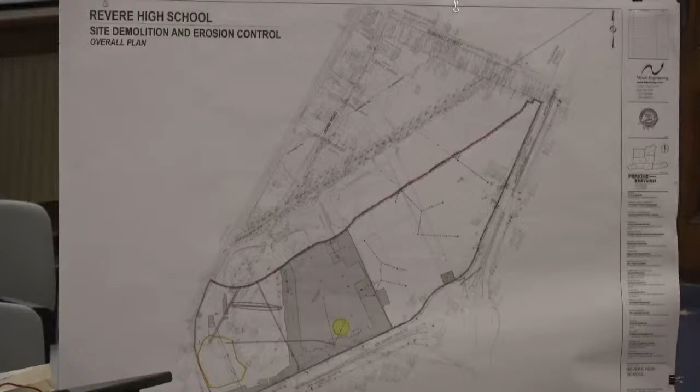This notice of intent, I know the commission's been long awaiting, learning more about the Revere High School project at the Wonderland site. This is for site preparation activities, so it's not necessarily for construction of the entire school at this point. It's really just phase one, preparing the site for that next phase of construction.

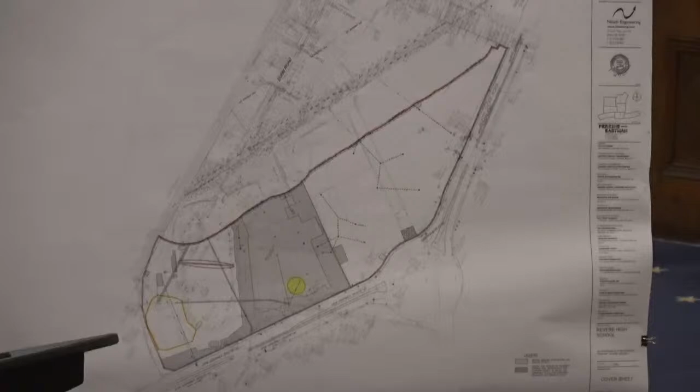To start the project off, the contractor would be enclosing the eastern portion of the site with construction fencing, chain link fencing, that's about 6 to 8 feet tall, I believe. And that's shown here in pink surrounding that portion of the site.

It's all in the paved portions of the site. As you see here, that western boundary of the limit of work runs right along the 200-foot riverfront area that extends from the eastern county ditch. So there's not going to be any work within the riverfront area as part of this phase one.

Along the construction fencing will be erosion and sedimentation controls. We had a site visit with a few of the commission members on February 1st, and a commission member requested that we provide a little more detail on the plan set of specific erosion and sedimentation controls installed around the limit of work. So along the 200-foot riverfront area, we're going to have super silt fence, which is just silt fence affixed to the construction fencing. And that'll be paired with mulch wattles as well.

And then those mulch wattles will just continue around the entire remainder of the limit of work. And when I say limit of work here, that's really encompassing where the fencing is. However, the limit of disturbance is not going to occur within that entire footprint.

As you can see here in the gray hatchwork, that is the proposed pavement and remnant foundations that'll be removed as part of this part of the project. It's about 4.4 acres worth of impervious area to be removed.

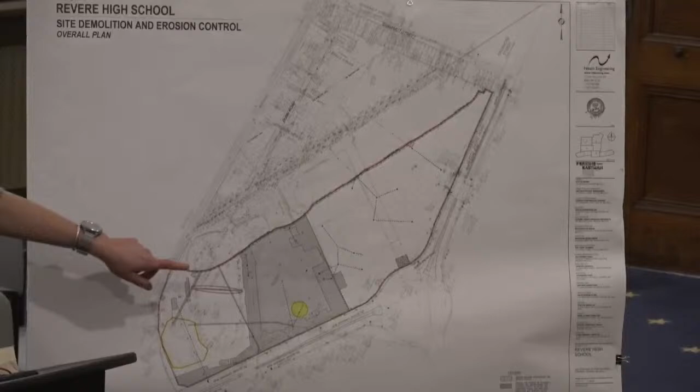That's a good question. With respect to what's under the foundation, for the most part it's really drainage that's somewhat minimally connected to other pieces of infrastructure within the site. The contractor would absolutely ensure that wherever they cut it off to pull out infrastructure upstream, there would be a disconnect or a plug of the stormwater system, so anything removed wouldn't continue discharging downstream.

To the second point, as far as the status of any existing infrastructure, to my knowledge it's not in great shape. It has not been maintained for many years. I believe Dave Conway is on virtually, I don't know if he's raising his hand. Potentially he might be able to touch on this more from an engineering standpoint.

I can speak to it a little bit. Thank you, Dan. The stormwater system there, as Claire said, has not been maintained. There's no real water quality components of the existing stormwater system. There's nothing that addresses quality. It's simply some catch basins that then outlet into the Eastern County ditch.

During construction, we're going to ask the contractor to clean the existing structures that are going to remain through this phase. They'll all be protected with silt sacks, maybe some filter mitts around them to reduce any potential for anything to get into them. But there's not really much of a functioning stormwater system out there now. Dare I say that probably hasn't been pumped out in 20 years, at least.

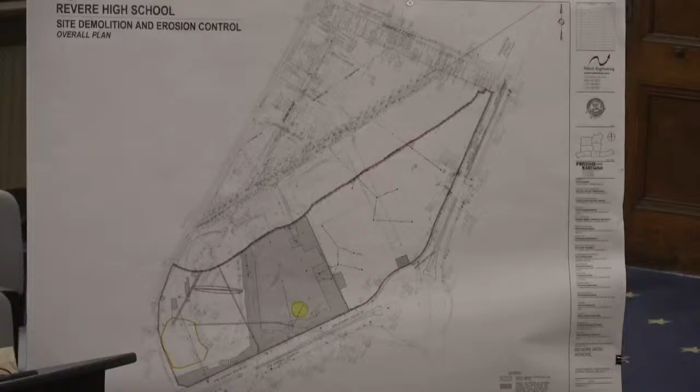Sounds good, I don't have any other questions. If any of the other commissioners have questions? I had just a quick question. In regards to traffic, is this all being contained inside of the lot that's being done? Will there be anything involved with traffic that will affect anybody? That is a great question.

The site access will be provided off of Butler Circle, right there, that's where the existing entrance is. The gate will be set back, I believe, at least 30 feet off of that entrance, so if any cars are coming in they'll have some space to pull in without actually stopping at Butler Circle.

But with regards to safety of folks coming in and getting around while contractors are coming in and out, VHB is also part of the project team. They're the traffic engineer, they've been working with MassDOT District 4 Boston, and we'll have to get a temporary construction access permit through them for this phase of the work as well, so they'll be working closely with MassDOT to ensure safety measures are implemented.

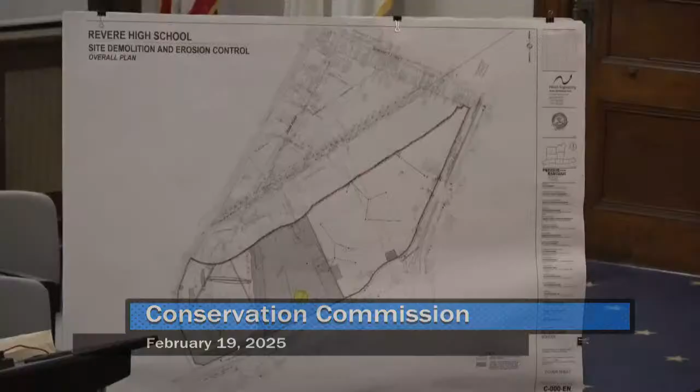One question that whenever this project gets brought up, and I get asked all the time as a commissioner on this, is whether or not the people that have been living in that area have been removed as of today, if the site is clear basically. To my knowledge it is an ongoing effort from the Revere Police Department to be assisting with that effort.

It's something that is a big part of why we wanted to take the vegetation out in that southern portion of the site and enclose the entire site with construction fencing, just in an effort to protect everybody's public safety during this process. So that's something the project team is keeping in mind and continuing to coordinate with the city to make sure those folks are off the site before any of this work starts.

I think that's perfect as far as the safety of everyone around, as well as for even safety of the site, being able to have it as difficult as humanly possible for someone that isn't supposed to be there. I think that's the best for the city of Revere and for everyone involved. Yeah, thank you. Any other questions?

When it comes to the erosion control and the sedimentation control, the process to keep making sure during construction - what I've seen in the past is that it gets moved, or because this is going to take many years, it's going to need to be maintained. Is there a plan for that?

Yes, absolutely. That's absolutely a part of, I believe it's even in the stormwater plan that we provided in the notice of intent application, but that SWPPP I mentioned earlier, that'll be a federal permit with the EPA. That will require the contractor to do weekly inspections and maintenance immediately - usually within 24 hours they would have to maintain or repair anything - and regular reporting as well, so they would have reports on site documenting all these inspections. There's usually also going to be another inspection that would occur after typically a quarter inch rain event or more.

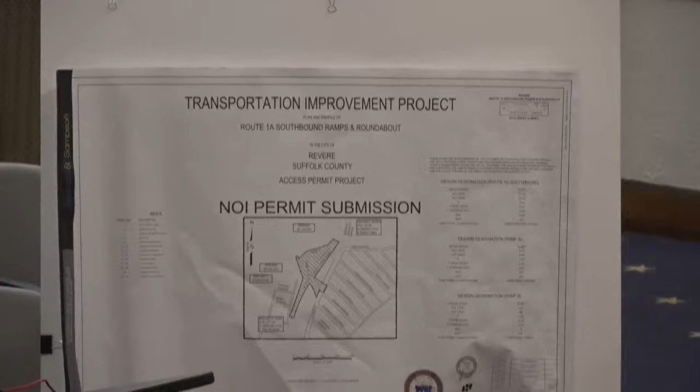Tonight we are looking for approval of our submitted NOI. A little bit of information about the project: tonight we're going to be talking about Phase 1 only, which is the roundabout and traffic infrastructure improvements for that part of the project. Phase 2, the Gibson Park Access Road, will come back again when that part of the project is ready to be submitted to this commission. The phase one part of the project will probably take about 2 years to complete.

We have not awarded the bid to any contractor, and it has not gone out to bid yet. But when it does, there'll be a construction schedule approved prior to any construction commencing. The traffic management plan is currently with MassDOT and has not been approved; that approval usually comes when we get the state access permit. Lastly, there will be some detours and overnight shifts. All residents in the area will be notified of any detours or overnight shifts that occur.

Most importantly, and what we're going to talk about tonight, is really the erosion controls and the steps we will take to keep the project from affecting the environment during construction. That will be maintained throughout the construction. I'm now going to turn it over to Devin, and she's going to talk a little bit about the environmental impacts.

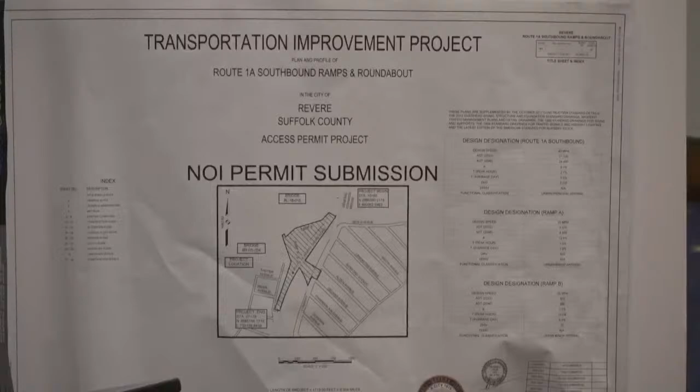We're hoping to display a presentation on the laptop that's connected, but if not, I do have some paper copies I can hand to you. Just make sure to state your name for the record. Devin Herrick, wetland scientist with Weston and Sampson.

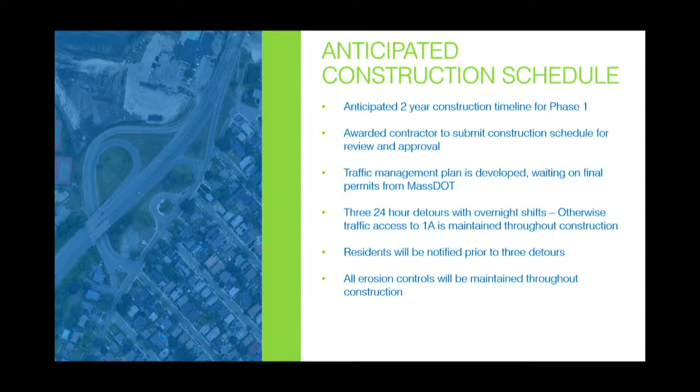This is the construction schedule slide that Julie had just gone through, so I'm going to slide right on over to an aerial map just to refresh folks' minds as to where this project is located. It is out on Point of Pines. For anyone who is perhaps a little less familiar, this is a zoomed in view of what the area looks like right now. The proposed project is on the northeast side of Route 1A. Right now you'll see two concentric ramps, and that is the area where we are proposing to install a roundabout.

As Julie mentioned, there is project phasing involved. We are here to discuss phase 1, which has a longer construction period. Phase 2 requires additional permitting in the form of some Article 97 concerns and Chapter 91, and it has a much shorter construction timeline, so that's only a matter of months. It's basically just installing a paved roadway in an already flat area; there's no regrading involved. So we expect these two phases will complete roughly around the same time, despite being on very different tracks due to permitting constraints.

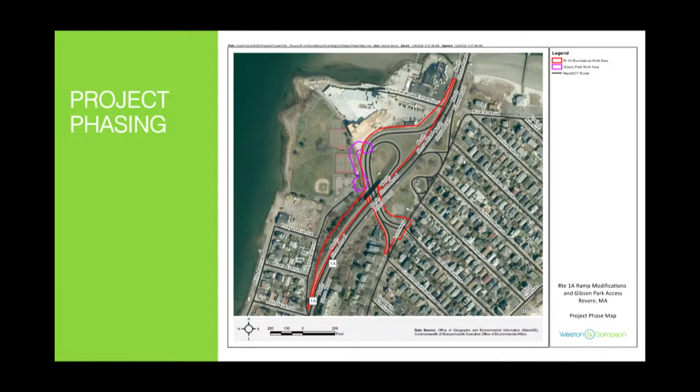And with that, I'm going to turn it over to Taryn to discuss a bit about the project. Good evening, Commissioners. My name is Taryn Wong, I'm a senior civil engineer with Howard Stein Hudson and one of the project engineers on this project. With this slide, I'd just like to again reiterate that we are talking about phase 1 tonight. Phase 1 is the new roundabout intersection that replaces the two concentric ramps, the southbound ramps. I think Devin might have noted northeast corner, but I think it's actually northwest, the western edge side of Route 1A. We're talking about the southbound portion of Route 1A.

So 100% of this project is within state right-of-way and is under the jurisdiction of MassDOT. We will require an access permit from both MassDOT and DCR because the project limits to the south intersect with Lynway. We also are proposing some work on Lynway, which is under the jurisdiction of DCR. This project is also adjacent to the current, basically finished, site development of 22 Whitin, also known as Gibson Point, that large building with several apartment units, and also the Gibson Park Access Project, which was stated to be phase 2.

That is installing that driveway with no regrading, providing access to and from the roundabout for the proposed Gibson Park upgrades. But again, that is phase 2, and with phase 2, we hope to file that Gibson Park access under a separate NOI as the permitting proceeds.

I'd like to also note that during this construction of phase 1, the roundabout and the new on and off ramps, that emergency vehicles will have access to residential areas, including the Point of Pines neighborhoods on the eastern side of Route 1A, as well as the Riverside community. During all times of construction, we know that this is a concern.

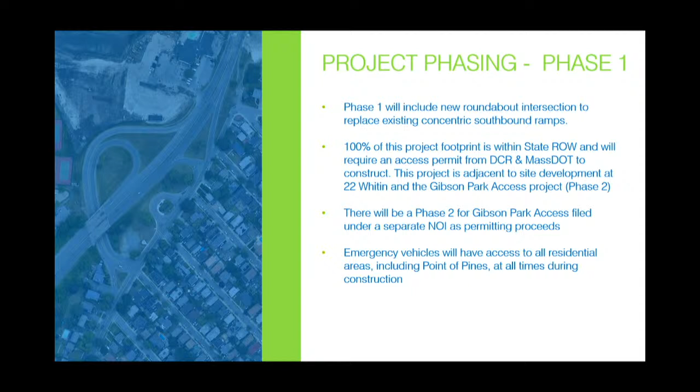We have actually worked quite closely with the Revere Fire Department, even on their reconstruction of their new fire department, right at the edge of the project limits. I think it's the new Point of Pines fire station, I can't remember the exact name, but yes, we've done quite a lot of coordination there.

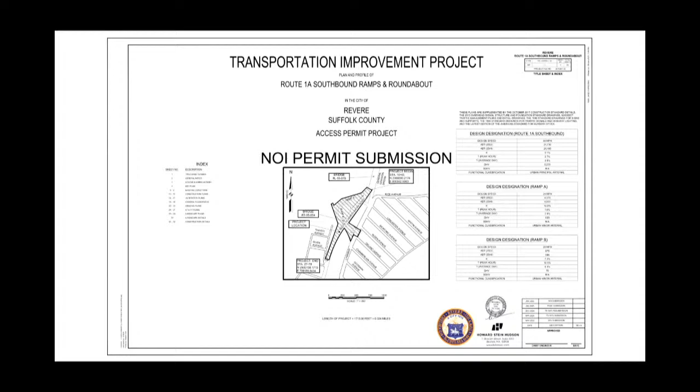So right now on the screen, the PowerPoint is showing the plans. We'll try to go through everything via the PowerPoint, but if we need a zoomed-in version, we can display it here on my left with the hard copy. I'd like to go through it, and I want to note there is an overall graphic at the end to help orient us better.

I'm just going to go through each individual construction plan sheet to describe what work is happening, but again, I will provide a high-level combined graphic, a colorized graphic, at the end of these construction plans.

So here, the project limits to the south would be at John Ave, Hayes Ave, that intersection where Route 1A meets those two roads. We are not proposing to do any work in the intersection, but our project will end right before that intersection.

We are looking to construct a new on-ramp, replacing one of those concentric ramps with a new on-ramp called Ramp B. That would be adjacent to the Gibson Park parcel, allowing vehicles to enter Route 1A southbound. This is what this plan here is showing.

In this phase, can you go back to that? In this phase of the project, what impact will there be on Hayes Ave during this portion of the construction?

There should be no impact to Hayes Ave. There will be impact, you will see construction vehicles and construction equipment on Route 1A, but our current plans have no construction staging or equipment staging on Hayes Ave. We should not be impacting that road at all with this project.

I'm sorry, I know you said at the end you wanted to show us the overall of everything. I mean, he's lived there his whole life and he still doesn't understand what's going on. So if you wouldn't mind skipping to the end for a second, just even a minute of showing us what the end project looks like, maybe even a comparison of the end versus what it is now, because I'm still completely confused.

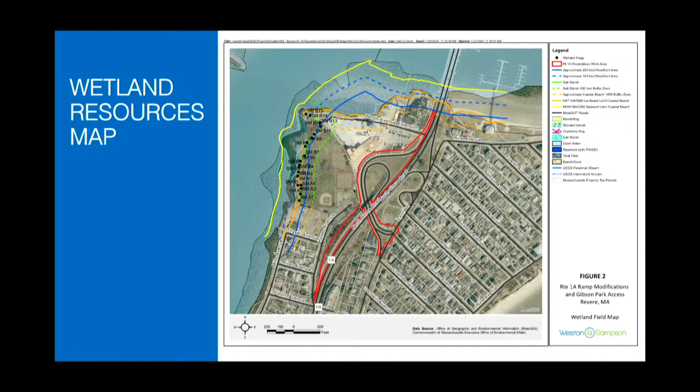We also have 100-year floodplain impacts. That doesn't make up the entirety of the project site, but it's a good chunk of it, and we can see that here. It's a little hard to see, but the entirety of the area is stippled to show that we have that Barrier Beach and Dune area. We also have a map showing the approximate limits of the 100-year floodplain, which were updated on the plan set based on elevation — I believe elevation 10 in this particular area.

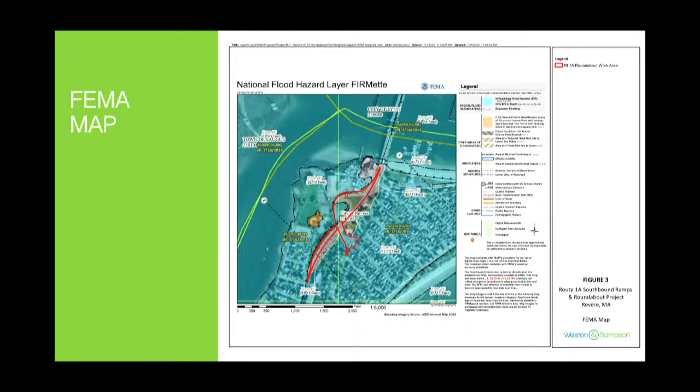To break down the specific impact numbers, we're looking at a total impact to 100-year floodplain, or land subject to coastal storm flowage, of 65,611 square feet. When we talk about permanent impacts, we mean anything resulting in a grade change or a materials change, whereas a temporary impact is something currently impervious that will remain impervious, or currently pervious that will remain so, without any grade change.

We also have Barrier Beach and Coastal Dune, both of which we're expecting to see a total of 186,335 square feet of impact.

One thing that we are looking to do on this site to improve the area is right now plantings are very sparse, if present at all. It's just a weedy mix that's located on the side of the highway. So instead...

44,714 square feet of the area will be replanted with native dune plantings. We have included the planting list so you folks can see the kind of palette that we're looking for. They were all taken off of the CZM list, and they are recommended for plantings in dune areas.

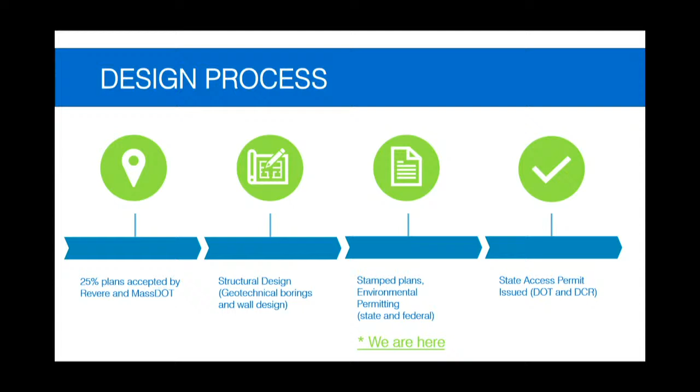So just a brief reminder on where we are in the design process. We have the stamped plans, and we are completing the environmental permitting. We will then go to the final step, which will be to get the state access permits issued from both DOT and DCR, and at that point, we will be ready to go.

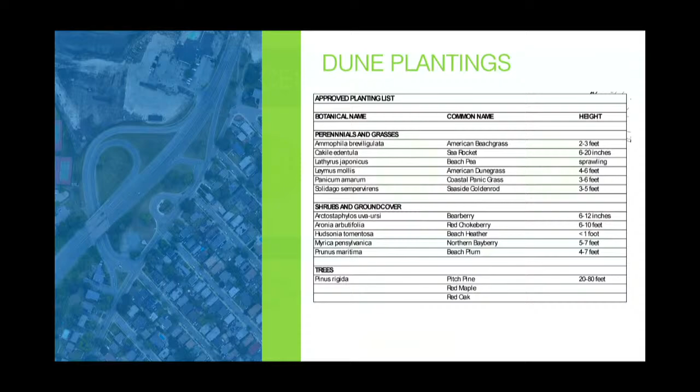So during the construction or after the fact, you have all these plantings. Who will be responsible for maintaining them? They're in the DOT right-of-way, so they will be DOT's responsibility to continue. They are dune plantings, so they don't really require much in the way of maintenance. I would imagine that they'll follow their current mowing schedule, which is not very frequent throughout the year.

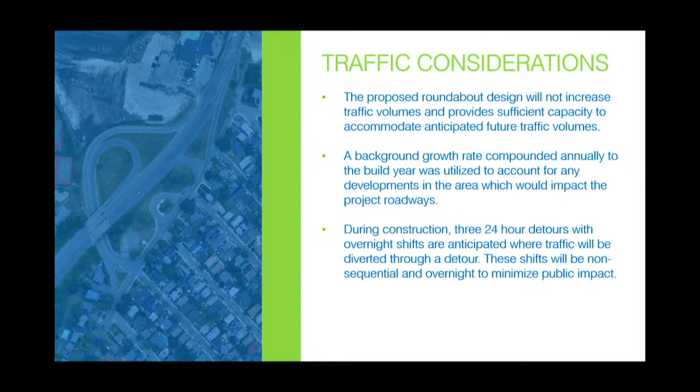I think it's maybe once or twice, but dune plantings are generally such that they don't require much maintenance, which is a benefit. My fear is that they will see tall grass and just clear cut it, and then we are left with what we have now. Is there a plan in place to keep these as natural as possible within reason so that visibility is not diminished in these areas, especially in the circle?

You have a good opportunity, obviously where the trees would probably be going and things of that nature. So I just want to make sure that they're aware that we would, the city would be wanting them to not just clear cut stuff up there. We want to make sure that the plantings that you put in stabilize the soil. They are also not going to be an impact to the environment or the adjacent areas, things of that nature. Is there a plan in place for that?

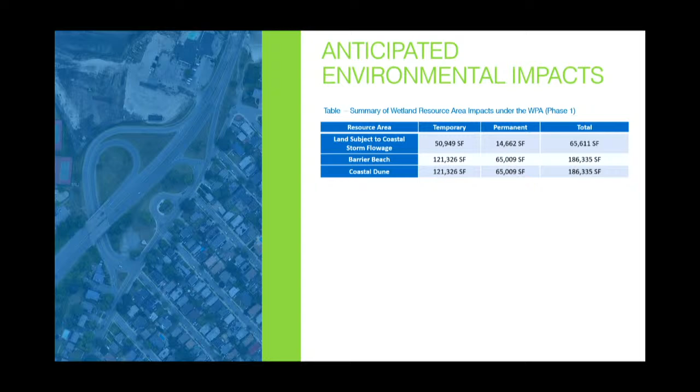I mean, oh, okay. Sorry, Julie, you- no, go right ahead. Go ahead, Devin, if you- thank you.

So within the circle, which is the area you were pointing out, yes, there are some trees, so the mowing will obviously go around the trees. To my knowledge, there's no specific plan beyond what DOT normally does for their maintenance. They've certainly been involved, they know what the plantings are. They were absolutely aware of the palette that was proposed, and they are on board with it. To my knowledge, there's no specialized plan beyond that.

Yeah, I just don't want to see them come in with their John Deere and just clear cut it. Yeah, I mean, obviously they're not going to do it to the trees, but the slope that goes up to the southbound side, you said you were going to be putting in grasses and things of that nature to take hold. I just want to make sure that it is given enough time to root and to stabilize the soil once it is all done.

So I think what you're saying, if I'm understanding correctly, is maybe don't mow that immediately, allow it time to grow in and stabilize itself. Correct.

Understood. There have been many restorations where they got a little overzealous and mowed things down a little too soon, and things did not have a chance to take hold. I've seen it quite a few times, and not just in Revere. It's a very common occurrence with the DOT in this. I just want to make sure that you have expectations of them in this project. I don't want to see a dead, dusty area when we get done with this.

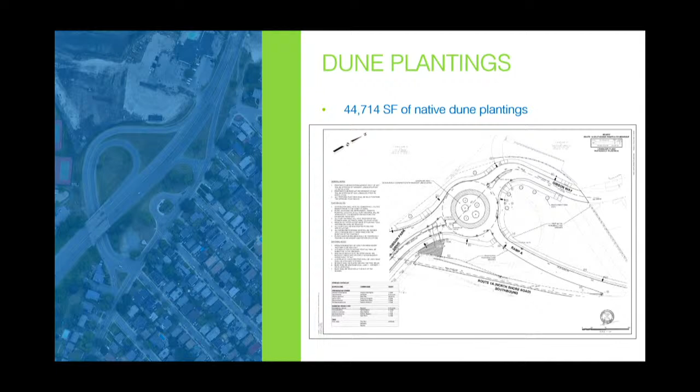The other question I was curious about is during the slip lane removal, what kind of impact, there are a lot of residents when you come off of that corner that will be impacted by the removal of the slip lane during construction. And I'm sure they're going to be looking forward to having green space, but the timetable that is going to take, what are you going to do to mitigate the impact to their properties? And what kind of restoration will you be doing if you do happen to impact their property?

Sure, I can take this question. We'll be affecting the driveways of two of those properties. The driveway will be reconstructed and extended to the Linway, so they're being taken care of, and the two pedestrian paths straight to their front doors are planned to be reconstructed. We have a detailed traffic management plan as part of this plan set, and as part of the submission there's a requirement with the state highway access permit, which will look to not eliminate access to private residences while this slip lane is being constructed. We don't have those in the PowerPoint today, unfortunately, but it has been engineered and considered so that we will not cut off access to those two private residences that have driveway curb cuts, as well as pedestrian paths to their front door.

I would definitely be concerned for those residents, not just for the driveway cut and access to their property, but since their homes are in the Barrier and Coastal Beach area, minimizing the impact to their property as well. I'm sure they've manicured and taken very good care of their properties in that area. I know they're right near a slipway, but it's someone's home, and we want to make sure we are mindful and sensitive to what kind of conservation area it is.

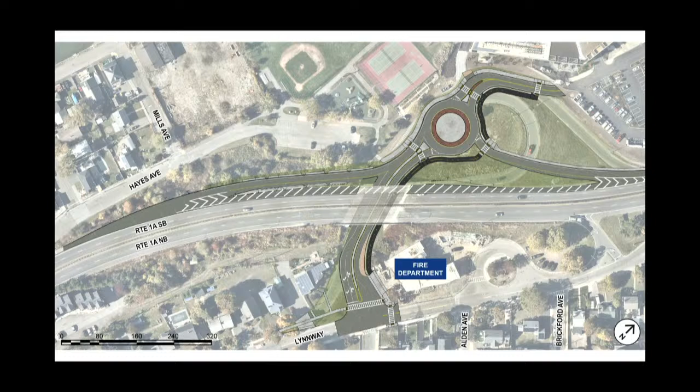Erosion controls, I didn't see much. What are your plans in terms of controlling that when doing the construction? And before you begin, I'd like to make sure everybody is aware we should be talking about the Wetlands Protection Act. We are not the Traffic Commission, and we are not here to talk about a lot of the concerns and how it's all going to impact. Let's stick to the topic at hand about this project.

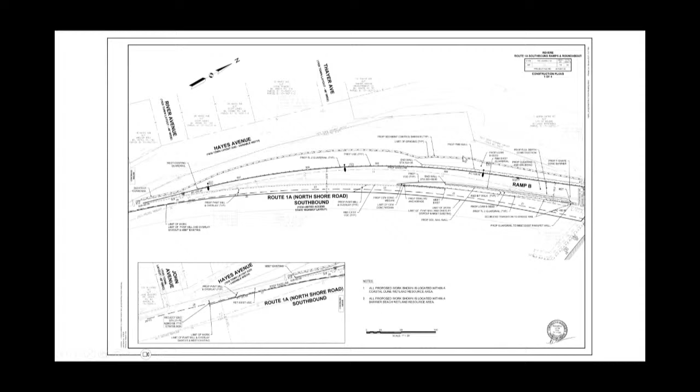So on areas of disturbance, I'll focus here on the current slope as we construct Ramp B. MassDOT standard detail is being used for the sediment control barrier, as you can see outlined right near the limit of grading. Because it's within state right of way and needs to meet state standards, we'll be using MassDOT's sediment control barrier, and that will go out through the entire project area of disturbance, as you can see here on the plan, north side along Gibson Way. As the mouse is tracking, there'll be proposed sediment control barrier. They've done quite an extensive amount of repair and restoration over at Gibson Park, and we definitely want to make sure the erosion controls are in place to secure that area as well. It's definitely a lot better than the G&J area it used to be.

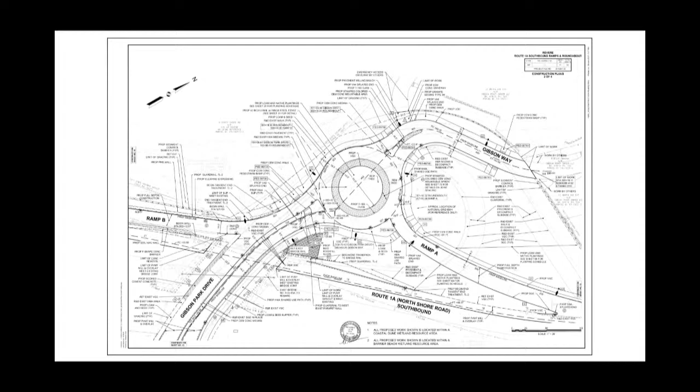Just sediment and control, or are you doing something about the drainage on the street? Are we doing silt sacks as well? Yes, for stormwater management we'll do silt sacks on any existing and proposed catch basins. So prior to, during, and following the project, using MassDOT standard details and procedures, silt sacks will be used for all catch basin inlet protection. Actually, as part of this project, we have a requirement to clean existing sediment, both the catch basins and manholes, the structures as well as the pipes. A certain percentage of the pipes will need to be cleaned before the project is turned back over and completed, so that's part of the project. Yeah, that's what I just wanted to make sure we had. Thank you.

Another question I have is what will DOT be doing prior to construction to ensure that the stormwater management system in that area is adequate enough to move water around during this phase of construction. I drive that area back and forth to Salem every single day, and I've noticed that those storm drains are definitely not in great condition. I would advise that they are cleaned out prior to any construction so that water can move effectively.

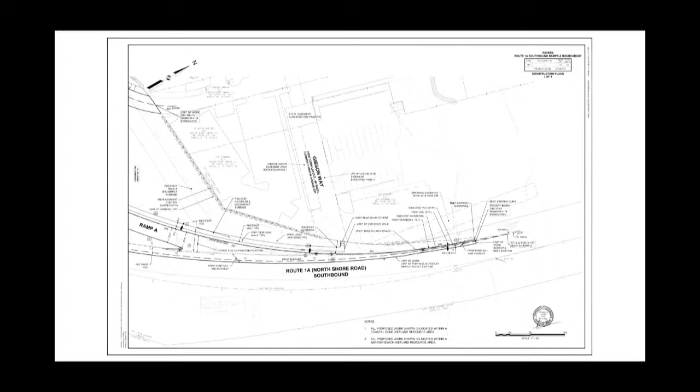Noted, thank you. Any other questions from the commissioners? At this time, I'd like to open it up to the audience. Any proponents for this project, please come forth. Anybody on Zoom, any proponents on Zoom? Hearing none, or did any opponents to this project? Councilor Sawyer, can you unmute if you were trying to speak?

I will state again, I don't know if I said my name earlier. I'm Pete Robleski with Howard Stein Hudson. I don't think I can count as a proponent since I'm on the design team, but I would consider myself one if possible. Thank you, Peter.

Councilor Sawyer, are you able to unmute?

No, she should be able to unmute, I believe. Andrew, just checking, no, it would be on her end, she'd have to unmute herself. Or maybe he has it all muted. Councilor Sawyer, are you able to unmute? Angela, if you can hear us, could you unmute yourself or type in your question? Maybe she's typing it in. Counselor, are you able to unmute or type in the chat? It's saying I can't unmute. Oh, there you are, we can hear you, excellent, thank you. It was telling me that I could not unmute.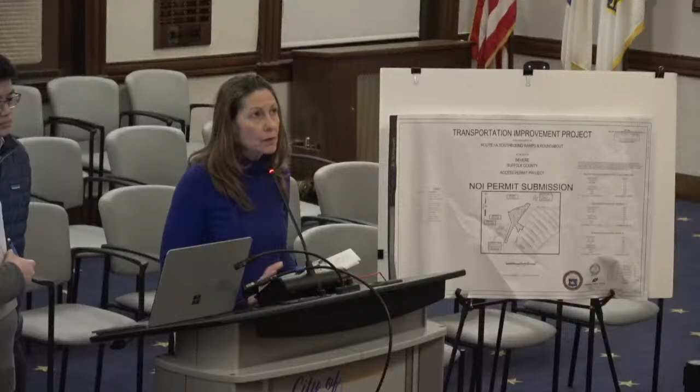So in regards to notifying the residents about any construction schedule, detours, or any parts of this project, that will most likely happen once the project has been awarded to a contractor. There'll be another meeting where we'll talk about the construction schedule. When it comes to detours and that type of stuff, we'll be sending out direct 311 notices to residents in the area. Nothing is going to happen like it did, I think it was two winters ago, where the southbound ramp got shut down and nobody knew about it, and everybody was freaking out in the Pines. That will not happen this time. We are committed to making sure residents know the schedule far in advance.

I personally adopt a practice where for any construction schedule, I receive an update depending on the scope and size of the project, usually two weeks or one week. I get a week's or two weeks' notice of what's happening, two weeks prior or two weeks following, and that will get passed on to you. I think we've addressed that, considering the nature of the area and the extensive nature of this project, that the concerns of residents will definitely be addressed as it comes up.

That is correct, and I cannot. I know there's been a lot of concerns with residents about whether we're going to shut their street down or detour traffic through their area. I can't answer that right now because we do not have 100% stamped plans from MassDOT, and our traffic mitigation and any detours need to be approved by them. Until we get that approval, I cannot speak to what that will look like. But as I've said before, we're committed to holding a meeting with you and your constituents prior to construction kicking off. And thank you for that, Julie.